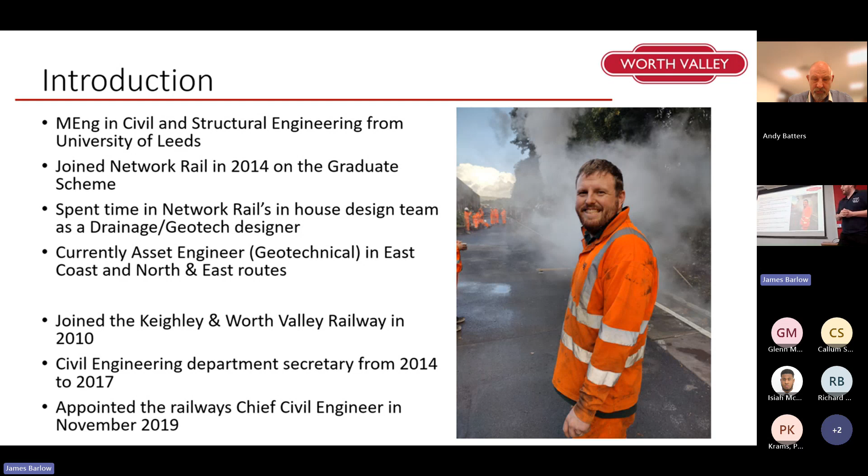The Keighley and Worth Valley Railway is located just to the west of Leeds on the way to the Yorkshire Dales. We join the national network at Keighley Station, which has 2 platforms that are part of the Leeds suburban network, overhead electrified. Then we have platforms 3 and 4, on a 99-year minimal lease that still says British Rail on it. And we then run up the Worth Valley to Haworth and Oxenhope.

Haworth, you may know, has been famous as the home of the Brontë Sisters. In terms of the railway, it's just under 5 miles long, with quite a lot of stations, a station every mile, and a lot of infrastructure to manage. It was opened in 1867 by local wealthy mill owners and then closed in 1962 by British Rail, as part of the Beeching Cuts.

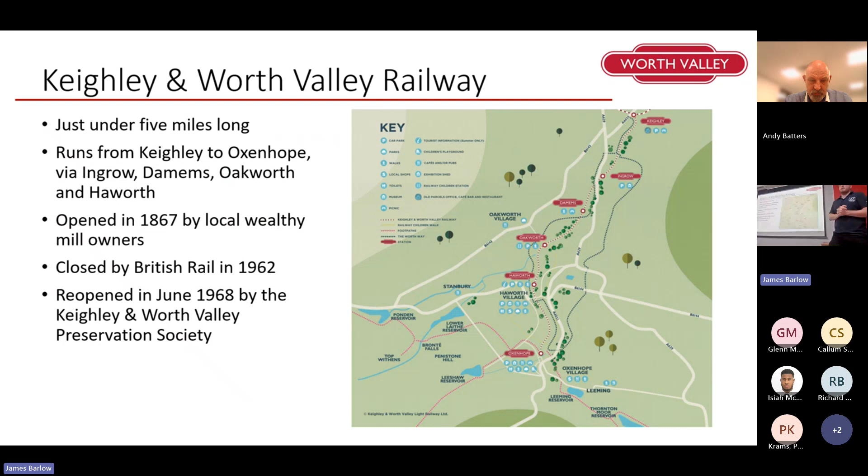Then in June 1968, it was reopened by a local group of enthusiasts and locals who wanted to see the line survive. Because it's such a key part of the local area, a lot of our volunteers actually don't have any interest in railways. I do, that's why I ended up there. But a lot of our volunteers are just local people who like the railway and where it is, which is quite different to a lot of them.

In terms of our department, we are 100% volunteer. There's no member of the team that maintains infrastructure that's paid. Volunteers come from a complete variety of backgrounds. There's a core group of us with industry experience who keep that professionalism and make sure the right competencies are there, but the vast majority of the department have no construction or rail background - ambulance drivers, lorry drivers, bus drivers, paramedics, IT business owners, a lot of students at the moment, and various other roles. We're called the Transatlantic Bridge Construction Company.

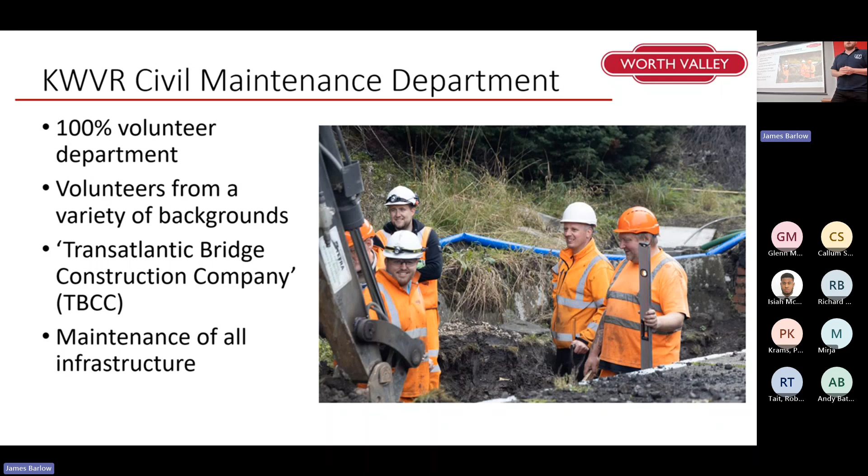I just mentioned that because it's our social media name. As I've said, that team maintains all the infrastructure, but I'm only accountable for the civil engineering. We have a track engineer and an S&T engineer who look after their respective areas.

So the theme of the presentation is trying to show what we as volunteers achieved. But I feel like at the start I should just point out all the people who did the bits that we can't do, because I don't want people to think we didn't have help or manage things professionally. So I'll list out the key ones.

The designers were Cass Hayward, a firm based in South Wales near Newport, can't remember the name of the town. We had temporary works design from Pell Frischmann - and the fact that the geotechnical director of the Wakefield Pell Frischmann office lives in Oakworth had nothing to do with that whatsoever. Bridge fabrication and installation was Beaver Bridges, piling was undertaken by Keller, and the large crane was Ainscough Crane Hire. We also had some local plant firms.

We had Vextrix supporting us with CDM compliance as principal designer. Special mention to the Environment Agency, who, including from myself, have at times had a bad rep over the years, but on this project couldn't have asked for a better partner to work with. I'll brag that I put a lot of effort into forming a relationship with them and making sure they understood the project, but actually we didn't have any hold-ups from the 7 permit applications we had to do throughout the project to get stuff done, which I think is quite a good achievement.

And Wyedean Weaving, they're an old mill next to the site that still make the beefeater costumes for the Queen and all the ceremonial stuff. It's a traditional mill - we used their car park, taking over their business car park for 7 weeks at 0 cost. So they deserve a special mention.

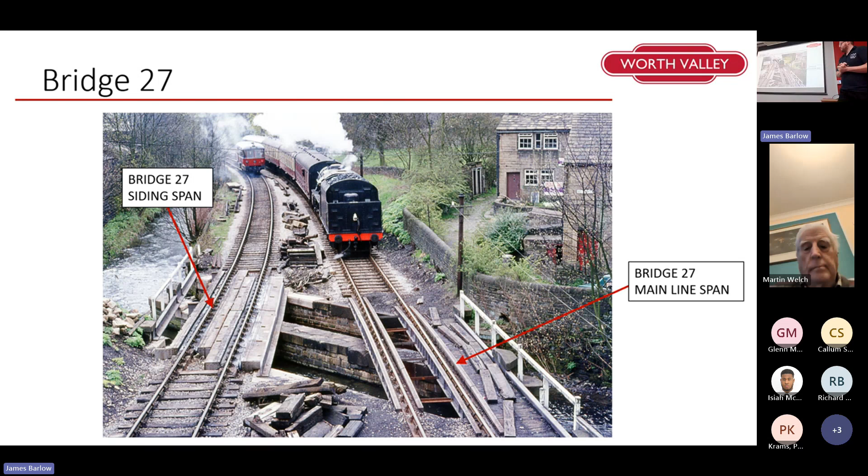But in terms of driving the project, it was all knackered - the substructure, the wrought iron girders, the waybeams - it was all well past its best when we got to it. That's what it looked like in the months leading up to the project. So pretty much the same, other than some new walkways and handrails, and looking a bit rustier.

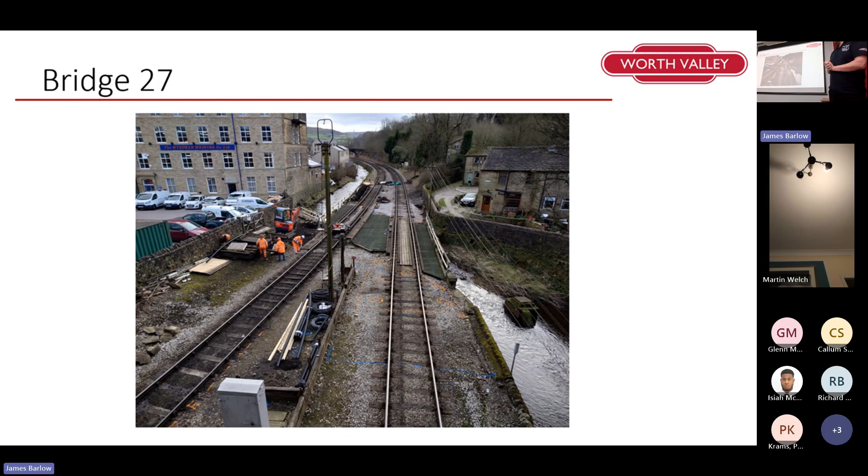Out of interest, you can see the location of the piles roughly drawn out there with the blue marks - that's when that photo was taken.

It was identified for renewal in 2014 as part of our structures inspections back then. It was originally built in 1889, and it was second-hand girders at the time, I believe, off the main Aire Valley line that ran up towards the north to Carlisle. So they were second-hand when installed in 1889, and they started to suffer from significant section loss.

The substructure was also in really, really poor condition - we didn't know what it was founded on, and trying to work it out was incredibly difficult. We wanted to really get rid of our last timber waybeam structure on the branch as well. I think we had 6 when we took it over from British Rail, and my predecessors had removed 5 of them, so we were really keen to remove the last section.

And not only that, as I'll show in a minute, this is a constraint on the river in the local area and leads to flooding of the lower Mill Hey area of Haworth, which is about 9 properties and 10 businesses. There are some dramatic photos online if you search Haworth flooding, but basically this one section of the river is the only section that's under capacity.

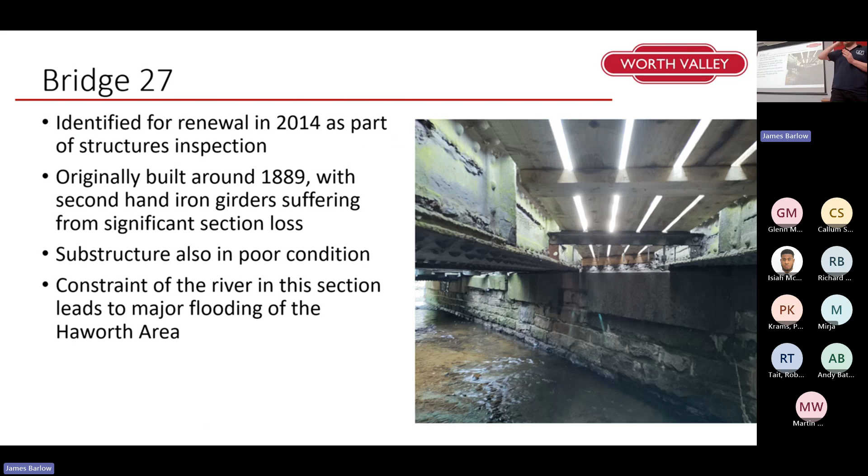It comes out the river here, and even though 20 metres downstream the river's got full capacity again, the water doesn't find its way in - instead it comes through our line and our yard. So that's it during a heavy storm, Wyedean Weaving car park on the left. That's it during a heavy storm, and that is our locomotive maintenance depot during a heavy storm behind us.

And then where you can see the chimney in the distance, that bottom area of Haworth then gets about a metre underwater. So this is part of a long-term strategy to try and improve the river capacity in the area as well. There was a number of reasons to try and renew it differently to how it was, including trying to remove that central pier.

So because of that flooding incident, we then turned the project - after identifying it in 2014 - into something different from a like-for-like replacement. We then had a more urgent bridge renewal, which got handed to me a month after I took over as civil engineer. And then COVID obviously had quite a large impact on our operations during the early 2020s, which delayed things.

Options report in 2021, and that's when we really started to get involved in the design development. At that point, I knew how key the discussion with the Environment Agency was - so before we'd even selected an option, I got the Environment Agency to site and explained what we were doing.

The key there was getting them to site, because when I tried to explain to them that we couldn't lower or increase the soffit of the bridge, since the structure gauge on the local structures was already at limit and we couldn't raise the track, the local flood officer just replied with a blank look, saying they didn't understand what that meant, insisting we had to raise the soffit of the bridge.

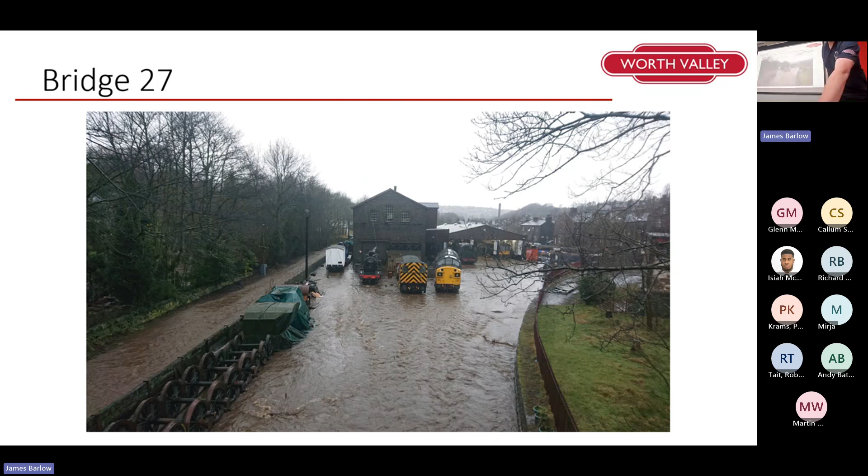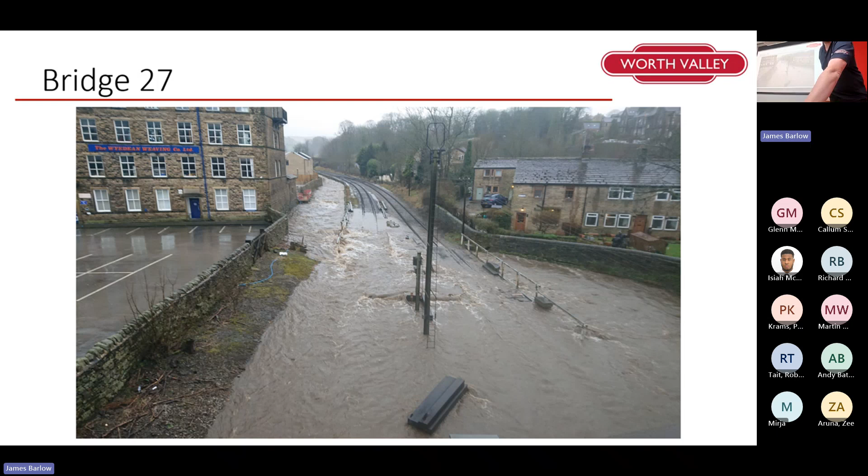But when you get them to site, you can ask, is that train going to fit under that bridge? Helpfully, when I got them there, a train came past and you could see how tight we were. The bridge I'm stood on to take that photo is already tight to structure gauge, and we're on about a 1 in 55 gradient, so in terms of vertical alignment we have very limited options.

In 2022 we started design development, and by mid 2023 we'd established the project budget. Initially it was £750,000. The quote for the steel deck between the options report in December 2021 and March 2023 went from £220,000 to £690,000 for fabrication and delivery, so it became quite an expensive project.

The final figure was 1.25 million pounds. The most expensive project the railway had ever undertaken before that was £155,000, so in terms of scale for the organisation it was huge, and it held quite a lot of pressure.

Once we realised we were getting towards that scale, we assembled a Worth Valley project team. It's worth pointing out that team was formed of about 20 volunteers, and we met every two weeks for three hours on a Tuesday evening for two and a half years, plus all the activities on site. It was a large volunteer team who put a lot of time into this project.

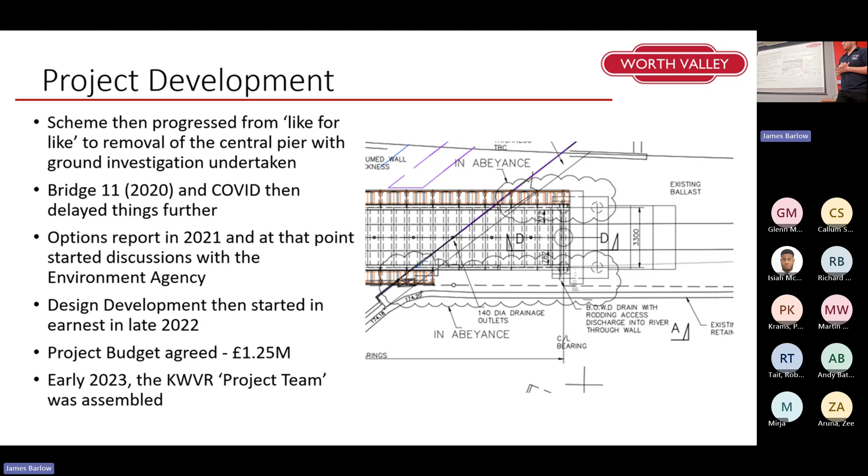I've already skipped to getting the Environment Agency on board with the project. We should have had to raise the soffit of the bridge by 400 millimetres, but they allowed us to keep it as it was. We couldn't lower it, but keeping it as it was was an achievement, and we were pleased they did that, because it allowed us to lengthen the span.

Other than the Environment Agency, Ainscough were the first company I contacted. While we were developing the project in 2023, we got wind that a crane hire contractor had been refused access into Haworth for a 50-ton crane. Our calcs showed that we actually needed a 500-ton crane to lift this in.

We straight away went to Ainscough and asked, what do we do here? They had a good relationship with the council, which helped us successfully apply through the council for a £1 million Community Ownership Fund grant to fund the bridge. The Worth Valley could have afforded to replace this bridge, but would have had to defer lots of other things. So this grant effectively allowed us to carry on with our locomotive overhauls and other restoration areas, such as Keighley Station, which had just recently been completed.

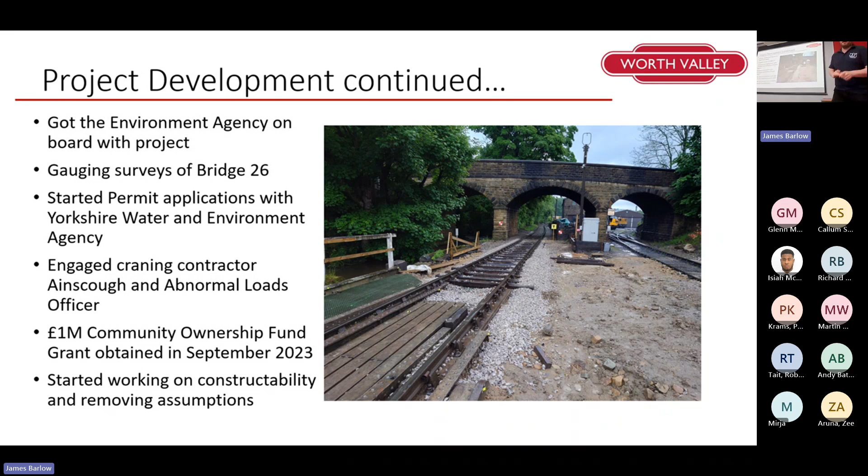Just a little bit about subterranean obstructions, apologies for the poorly drawn diagram. The black line on the left with the blue is the water, the river. The black is our abutment. There was a culvert that came out of that abutment, and you can see the grey assumed route - that's where it was mapped on our records, on the Yorkshire Water surface water drainage records.

And on the line plans from the original construction of the line. Where the culvert actually went when we dug it out was that orange circular route, basically following the piles. I still remember the day I was in Slovakia when the team dug that out. We realised there was a problem, that it wasn't quite as the drawings were telling us. We said, right, we're going to have to take the track off and dig, and we're going to have to find it. They sent me a picture of it, and I still remember the bar I was in Bratislava when I looked at it and just went, how?

When all 3 different independent sources said that the grey was the assumed route. We also found at that point, which is lost information rather than it being poor records, that there were some cottages next to the railway that had been demolished for the railway, and the cellar floors were in the way of that. Because we were rotary piling, any of these would have stopped the rotary piling from being done. So yes, interesting - I like the diagram because it follows the piles so beautifully.

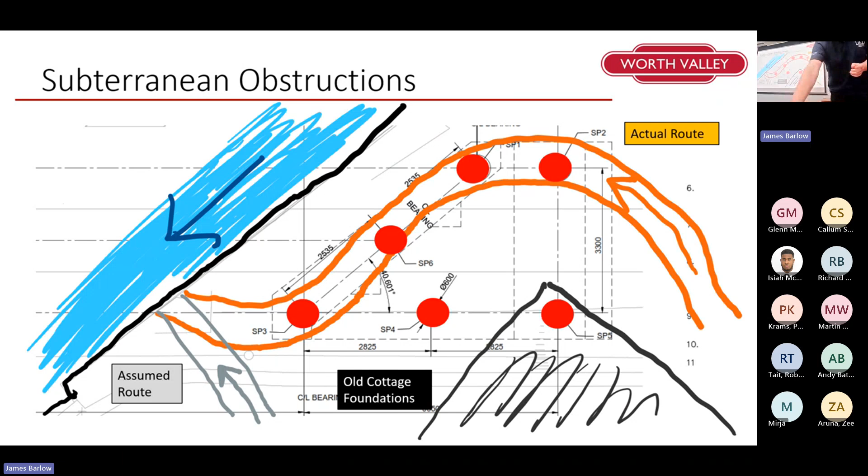Detailed design. Cass Hayward, who for me and a lot of others is definitely one of the leaders in direct fastening - while we'd managed to get rid of the timber-way beams, we couldn't get rid of it being direct fastening. We just didn't have the headroom to put a ballasted track in there. It will remain our only direct fastening structure on the railway. And as I said, Vextrix supported us with CDM compliance as principal designer.

So the final design ended up consisting of a 23-metre span - that's 23 metres on the skew from the furthest ends, or 17 metres if you treat it as a true skew. It's sat on 2 pile caps at each side, which you can see on the 3D drawing at the top. Then you've got a short triangle section on top of that pile cap to flatten off the transition from the solid track onto the ballasted track, with transition slabs sat in the pocket there as well. It was 6 piles, 0.6 diameter, 16 metres deep. The pile number changed numerous times through design.

The ground investigation information was 6 years old by the time we got to it on this project, and was undertaken by my predecessor. Due to a self-confessed oversight on my part and the designer's part, we didn't spot on one of the boreholes, in italics with an asterisk next to it, that they'd hit artesian water at 20 metres - for those who aren't aware what that is, effectively when they got through all the clay, this part of West Yorkshire is what I would describe in technical terms as really bad clay. And when they got through that down into the bedrock, there was enough pressure in the water in that bedrock that the water came 3 metres out of the ground.

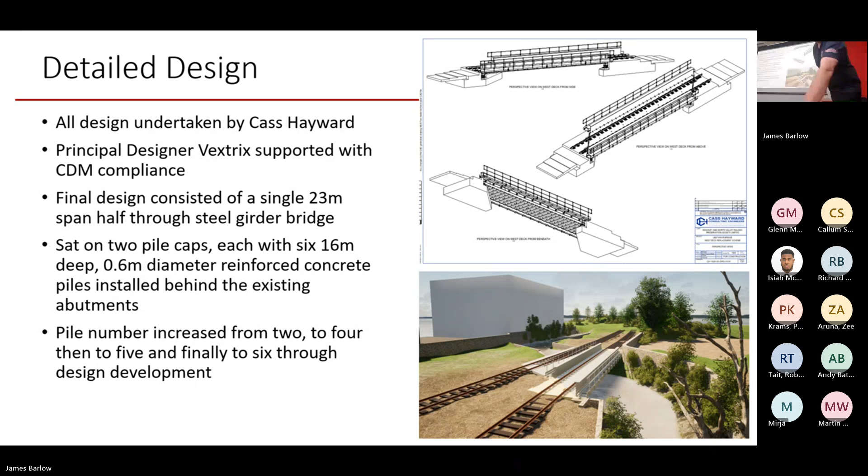So in terms of the design, track is directly fastened to the steel deck via Pandrol VIPA base plates, which I knew nothing about until I used them on this project as a geotechnical engineer. Effectively you've got a seating plate on the deck, and the VIPA plates are attached to that seating plate, meaning at no point to undertake maintenance do we need to get under the bridge for any bolting.

That was quite a key change we made partway through when we realised we had 25mm to play with, so we used that 25mm to get those plates on there.

As I said, the steel deck is still very skewed with the concrete pile cap squared to the track alignment. The pile caps are completely separate from the existing masonry abutments on the bridge. The pier gets removed, but the abutments are kept as river training walls effectively, and we've got concrete fill between the pile cap and the abutment wall.

It's probably worth mentioning one thing we did in the planning - although we don't need planning permission, it's in a conservation area, so we need prior approval from the council. We have to demonstrate we're doing everything we can to maintain the character of the area and not doing anything adverse. So maximising the amount of masonry still on view and hiding the concrete was one thing. Painting it grey - the final colour is grey, same as all the other metallic bridges on our railway - and the existing handrails are white, which is why our handrails are white. Those were the three things we did to placate the council.

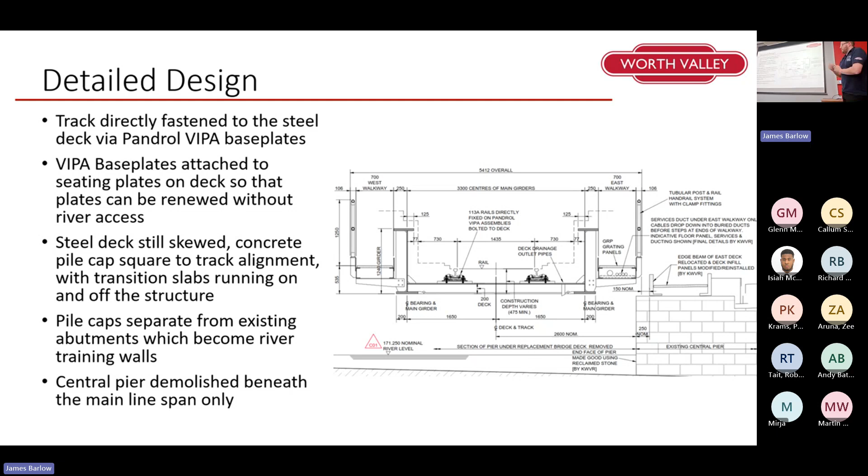There was no reason not to, it didn't affect us particularly. And then the central pier was demolished, but only beneath the mainline span, not the siding span.

And then there's some pictures of the detailed design, so you can see the VIPA base plates. For anyone with experience using base plates like that, every single base plate needed an individual amount of shims when we installed it - that was a fun Tuesday.

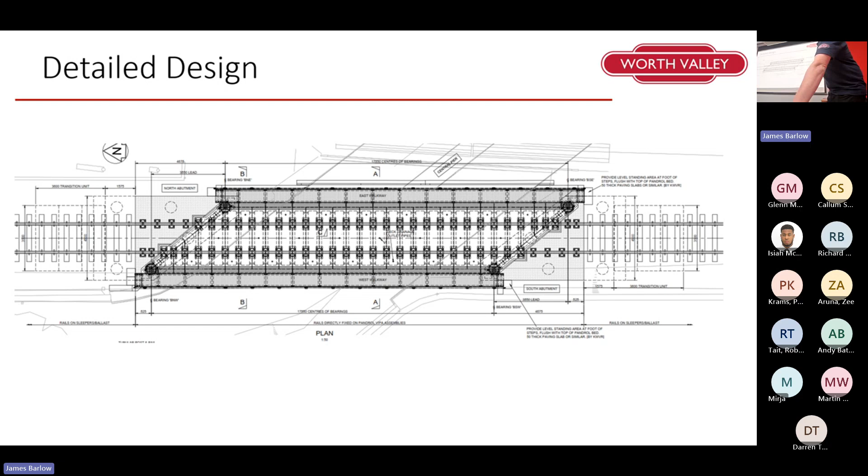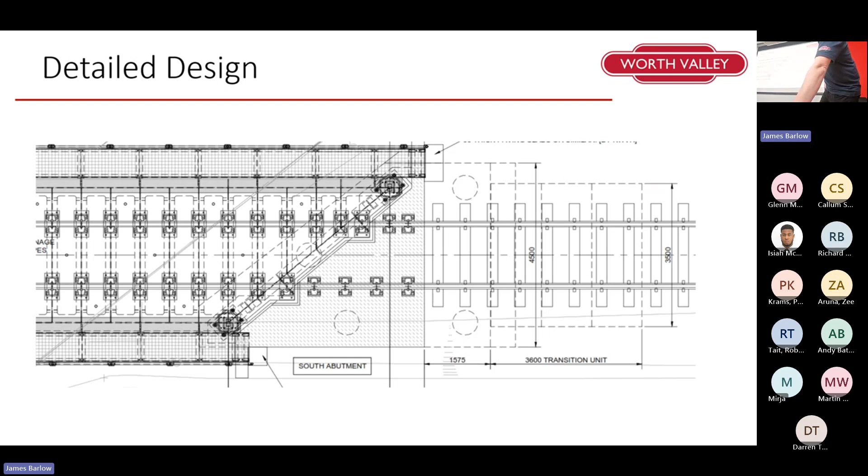That's just some more detail on the end. So you can see the 6 piles were not loaded evenly - you've got the 2 piles directly under the bearings on the skew there taking most of the load, and then some additional piles just to take the rest of the load.

And then there's your elevation view as well. You can see on the bottom section, with the gradient in the concrete, it was quite challenging for setting out and the reinforcement. That's why the Worth Valley didn't do that with our little cement mixer - we left that to Beaver Bridges to do through their subcontractor, who I can't remember now, but they are Middlesbrough based.

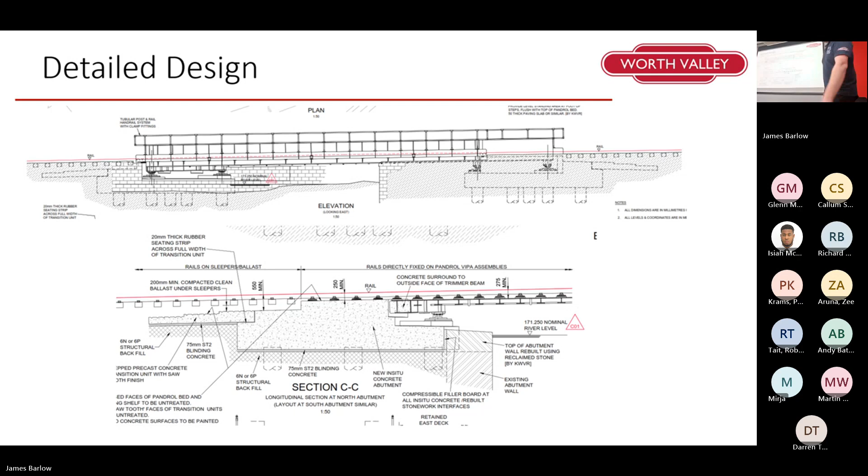In 2024, in February, we then did diversion of services. We've got overhead telecommunication services still, like the old school telegraph lines, and some buried stuff too. Every service we had was in the way of this job, so we went 100 metres north of the site and south of the site, got them all into a single duct, took them away from all the work around - which was quite a lot of work in itself.

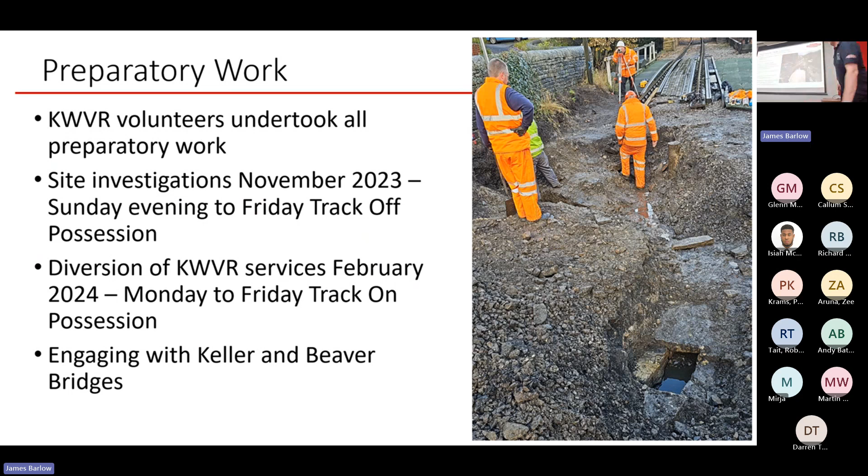And at this point, we're starting to go into contract with Keller and Beaver Bridges as well. And then piling platforms designed by Pell Frischmann, widening - weaving car park again, showing its worth with the access gate into the site.

Pell Frischmann designed some piling platforms for us. We worked with them to get that to a level the Worth Valley could build ourselves, so we installed the piling platforms ourselves with locally sourced stone. If Wyding Mill wasn't there, you'd be able to see the quarry that stone came from, we could hear the lorry leaving the quarry with the stone when it was coming down.

We had to get it tested, and spent a little bit of money doing that because it was a quarry that didn't do its own certification. We needed 6F5, and they wouldn't certify their own, so we collected some, took it to Leeds and certified it as acceptable and used that. That was a lot cheaper than going to a further away quarry, and it's always good to use local.

As a railway we try to put money into local businesses as much as we can, and we do a lot. All the plant hire was from a local farming plant hire company just up the other side of the valley.

In that picture, on the south side of the bridge you can see the diversion of the drainage. Instead of it running along the line, we took it and hugged that wall as close as we could get the trench boxes to let us. There was 2 mil between the new pipe and the pile cap when it was installed, so we used all the room that we could possibly use.

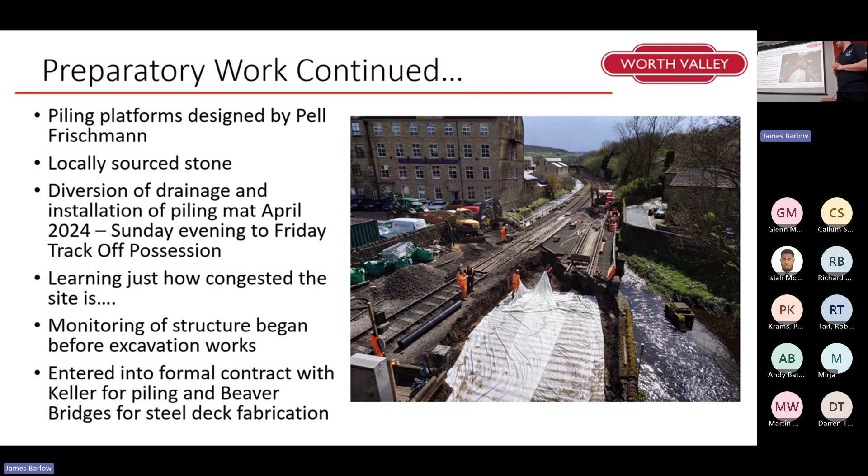And then piling - I think this is one of my favourite photos, showing how difficult the site was to manage.

One way of keeping our costs down is to not bring in rail contractors, because they are more expensive than high street contractors - there's no getting away from that. So a key part was extensive briefings and our supervision of site, and we did all of that.

What you can see there is Keller piling on the north side, and then you can see us using our train to bring in stone to do the piling platform on the other side. Again, the widening weaving car park is full of plant, full of equipment, no cost. And you can see the existing bridges left in place while we're doing all these phases - I haven't touched on that.

It would be much more efficient, and probably cost a little bit less, for us to just say we're going to do this in 6 weeks and do the whole thing. The main thing stopping us is actually volunteers, because my work aren't going to let me have 6 continuous weeks - I'm off for 3 months for shared parental leave at the moment, but for this I can't just take 6 weeks off work. I don't have enough leave, and we can't resource that as volunteers at all. So the staging of the project is just the only way we could deliver it - that's why that bridge is stayed in, and that's why it's covered in monitoring. I'd have much rather just removed that bridge and got cracking.

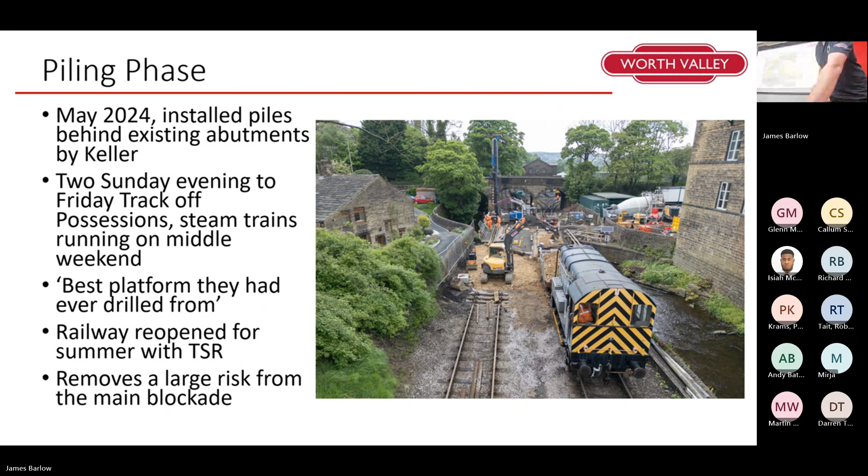It's just some aerial shots again showing just how close to the existing structure and how tight that is. That piling rig couldn't be any larger than that, because it had to fit on the siding span to get it to the other side of the bridge. There is no access to the railway, there is no access for non-rail plant anywhere on the other side of the bridge, so any non-rail plant had to go in over that structure. So that was the largest piling rig we could get.

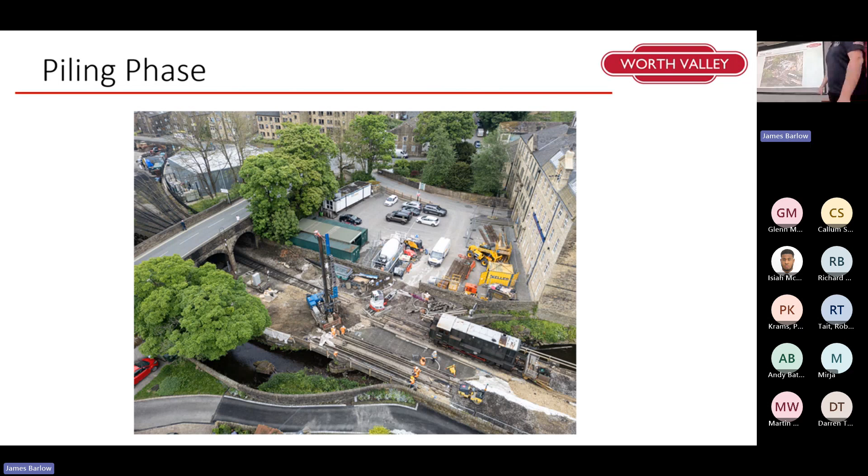Bridge fabricator Beaver Bridges has got a facility in Wigan. I think they're Shrewsbury based, but they've got their facility in Wigan, so it's nice, just along the M62.

There were lots of challenges around the fabrication. They had their challenges, particularly around the quality of the steel initially, and also the direct fastening nature. So while they've done rail bridges, they've not done a direct fastening rail bridge, and understanding that to the mill tolerance, as my track engineer regularly told me - well, they learned some lessons, and as did we.

I do remember an entertaining conversation with them when they asked to delay the possession for 3 months, which would have put the possession on the due date of my wife's first child, and I explained that to them. At that point, they started working weekends and evening shifts. To credit to them, we offered to cover 50% of their extra staffing costs to speed it up, and they rejected us on that and didn't do it. So fair play to them on that, and they did deliver it in time.

What it did lead to is we didn't have enough time to adjust the track design. So getting the track right over the bridge at the end was a last minute thing, and it wasn't as quick as we'd have liked.

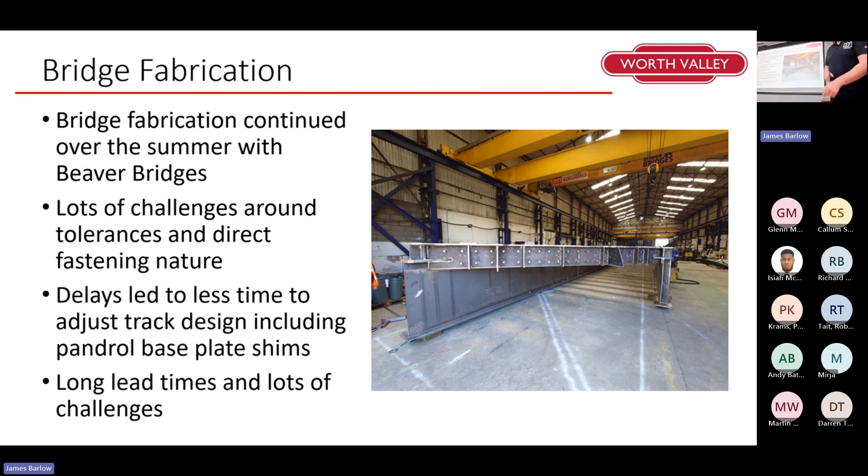And the Vipa base plates have very long lead times on the shims, like 6-week lead times on shims, which we found quite interesting. At 20 grand - not 20 grand a unit, 20 grand for all of them, I think, can't remember actually - it was a lot more than I thought it'd be.

So by the time we'd actually worked through the program, we worked out Beaver Bridges really needed to be on site on day 1. Originally we were planning for them to be on site on day 3, but to get it done in the 19 days we had, we needed them on site on day 1.

So we undertook demolition on Sunday night in one hit. We demolished everything we could in advance of the possession. All the walkways were removed, and any bits of the pier that didn't support any structure were removed as well. And we managed to do that in evenings in the summer.

So throughout July and August, we were running 2 engineering gangs a week on an evening, like 5 till 9, including delivering materials. I include that train only because we think it's the heaviest train that's ever run on the Worth Valley for anyone of note. We think it was - I can't remember the tonnage now, it's far too long - but we think it was the heaviest train we've ever run on the Worth Valley.

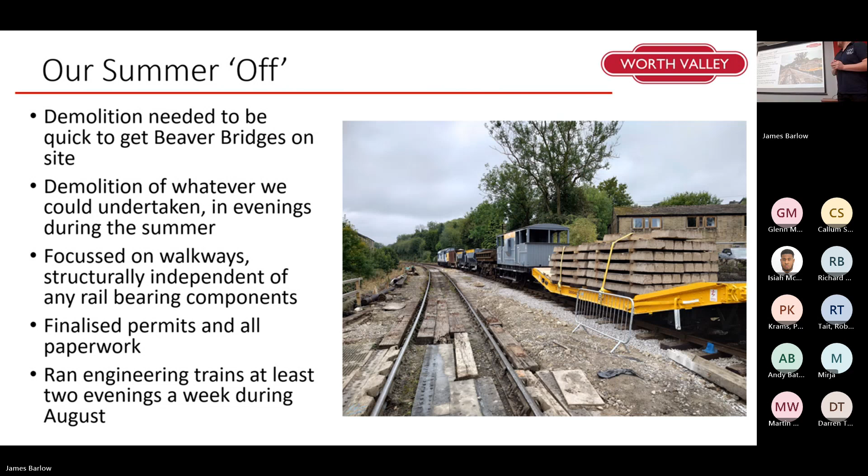We finalised all the permits and paperwork, and as I said, we ran the engineering trains 2 evenings a week. One thing I do love about volunteering at the Worth Valley compared to work is that it takes me about 5 minutes to take possession. It's that simple. And it's not simple as in unsafe or cutting corners, let's just be clear, but just the simplicity of our operation means that he's ready there with the impact wrench, because in 5 minutes time he was undoing fish plates.

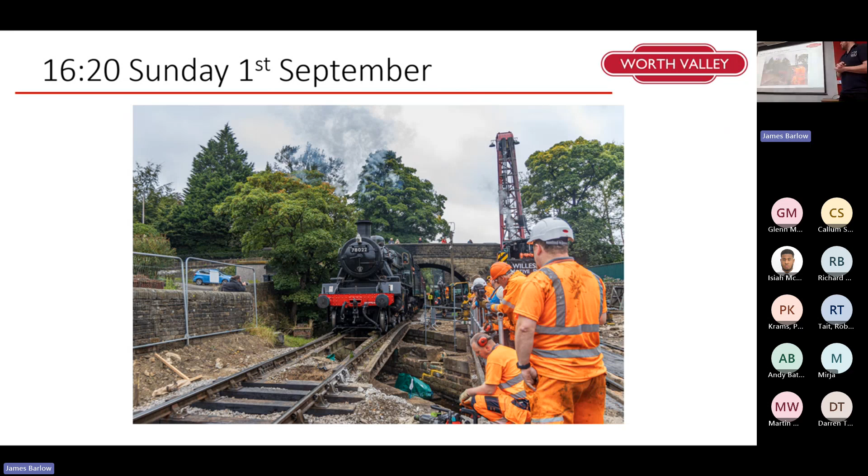It's a bonus, but it also allows us to do as much work as we can in the evenings, which we take a lot of advantage of.

So this is then us into the main blockade in September. We started after the last train on Sunday, the 1st of September. Time to take possession around 5 minutes, which I've said.

We utilised 2 steam cranes to remove the track and the girders. I like using these cranes, they are really, really nice. What you don't realise about a steam crane is they're silent - you can talk to the driver. They don't make any noise at all, which, having worked with diesel cranes, is fantastic.

It makes it safer, and they're also just quite cool, I'm afraid, they really are. So that is a 50-ton crane from the 1930s that used to be based in Willesden Depot in London, that's been restored by Bahamas Loco Society, and that's it taking the main girders out. It managed to get that done in about 30 minutes, and once we'd done that, they were put to one side to be moved by a smaller crane up the line. When I say they're really good, they are quite slow, but other than that, they're good.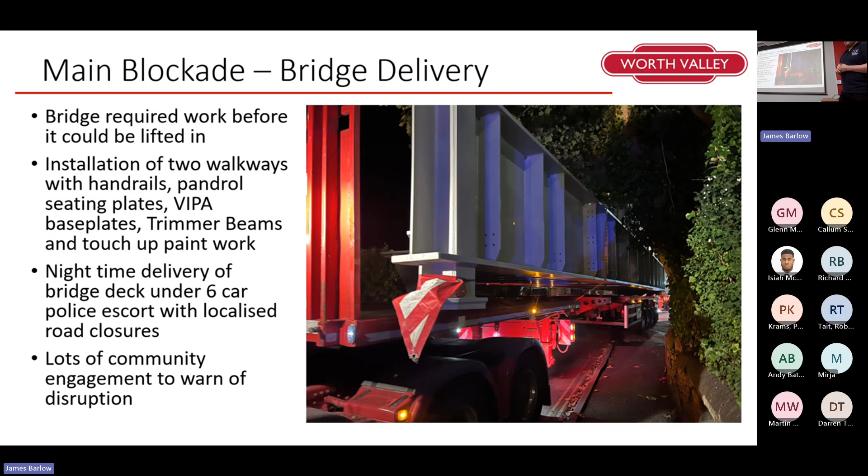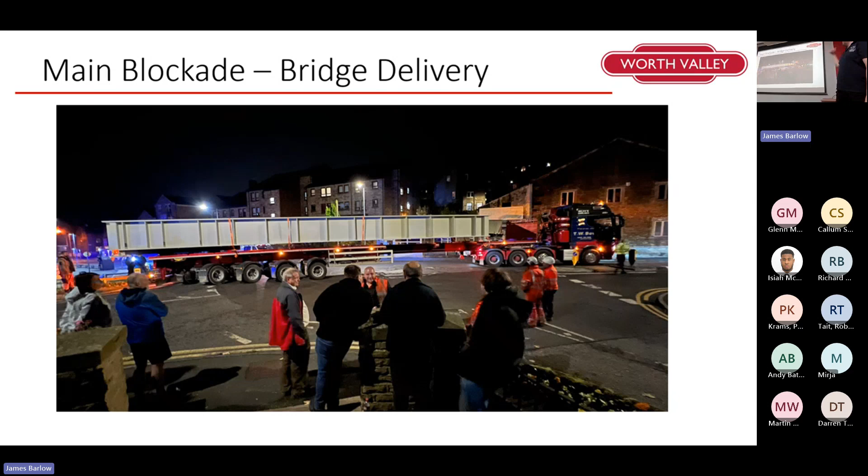They were really understanding, all out watching all the phases of the work. And that's it, doing a 16-point turn on the mini roundabout, coming forwards down the road to the left, coming in, and eventually reversing towards the camera. This was 11:30 at night. You can also see how much room it takes up in the Wyedean Weaving car park.

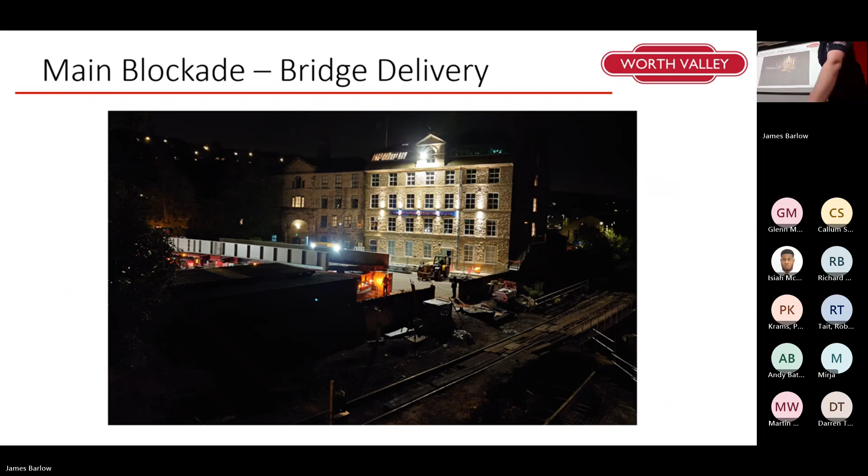So in terms of the main lift, good crane picture, always like a good crane picture. This was the bit that required most of the planning, and it only took 10 minutes. Special dispensations from the Highways Department, which I've talked about. The council were really good to work with on this.

And what do they call it, the Abnormal Load Officer for West Yorkshire. If anyone knows, West Yorkshire is particularly strict on their abnormal loads, requiring police escort at all times, which is unusual. North Yorkshire, for example, is not like that.

A 50-ton deck by the time it got lifted in, with a 450-ton capacity crane. It was not at its limit obviously, with the conservative element of it, but that was at its limit for what it could lift.

You'll also notice just how accessible the site was for people to watch. I remember my brief that morning reminding people that they will be on YouTube that day. Just to preempt a question, the bridge is installed at that point and the people on the right have been allowed back there, they weren't there during the lift. We had about 250 to 300 people from the local community, and my parents came as well, which was quite nice, since they don't really know what I do at the Worth Valley, so it was nice for them to see I'm actually doing real stuff, not just playing with trains. That was a good day, and the sun shone all day.

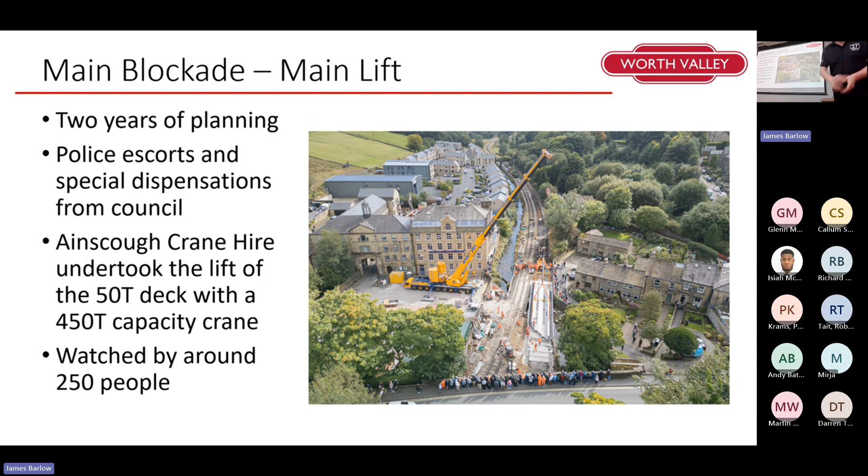And then we go on to the track reinstatement. I'm not the track engineer, so I don't know a lot about what the track put in, but it was bullhead, and it is now 113-pound flat bottom, and we are in the process of welding it up.

There was the horizontal alignment change because the new bridge was longer, so the horizontal alignment had to change because it was straighter for longer. And the vertical alignment changed because the bridge is on a slightly different gradient to be able to get the track under the adjacent overbridge.

There's been a follow-up track renewal to finish the job, not next year - I didn't update that bit two months ago. It's actually formed part of a wider track renewal, and hopefully by the summer that will be our first section of CWR on the Worth Valley, which is going to be just over a quarter of a mile, maybe a bit longer, including over the bridge. It'll be the first section of stressed up CWR.

Breather switches have been installed at the south end as part of this job, and we undertook about 100 metres of track renewal to the south of the bridge. Lovely, we're about there, we're good. We finished that off this year, just haven't done the welding and stressing yet.

That's the other steam crane, so that's only a 10-ton steam crane, also from the 30s. Very good P-way crane.

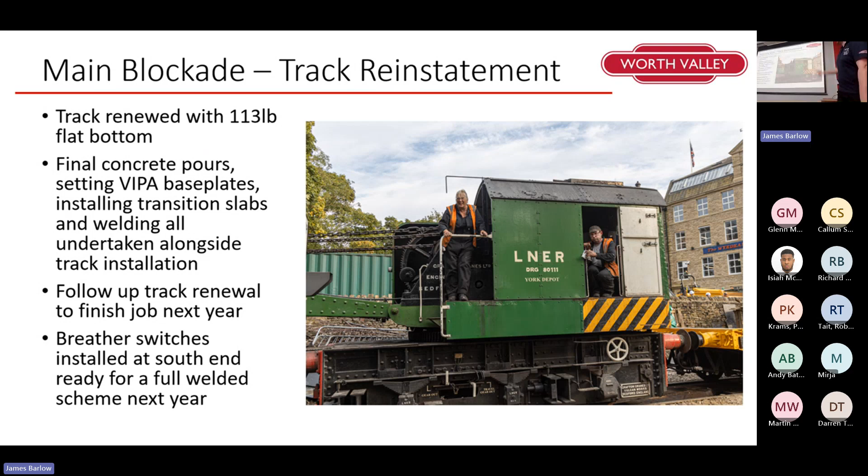And then the first train we ran on the morning of Friday the 19th with ballast, which is that train there. Not to be underestimated, having done all those possessions and sites over the summer, how much mess we had made.

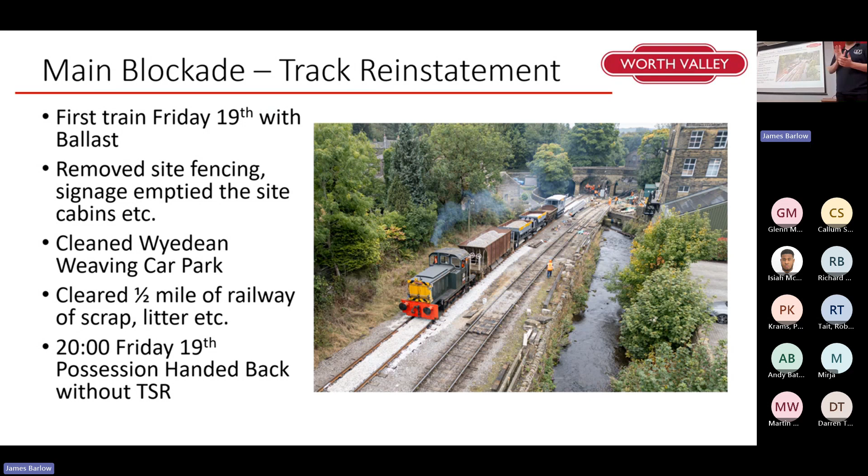So all the helpful volunteers that weren't up to track packing on the last day removed all the site fencing, site signage, the site cabins, and cleaned the car park, because in 3 weeks of mixing concrete there we had made quite the mess. We cleared half a mile of railway, and then at 8 o'clock on Friday the 19th we handed the possession back. We managed to hand it back without a TSR as well - we're only a 25-mile-an-hour railway, so it's not that much of an achievement, but it's still quite pleasing to always hand back without a TSR.

I'm going to skip back to that. I think it's right to talk about the challenges. I will wax lyrical about how amazing this project went and how good the project manager who led it was, but actually we did get quite a few things wrong, and there were quite a few pitfalls that we went into.

Volunteers are the best and worst people in the entire world. They are great for being keen and turning up, but they also have opinions. We had a lot of arguments internally, like, how dare you close the car park that I park in to maintain my steam engine for a day because you need to host 5 HGVs and 2 cranes? I want to park there. Well, can you not go and park across the road? Well, that's £1.10 for the day. You're like, right, okay, go away.

Having that, it's good that people are passionate, but sometimes it can create clashes. Really tight access, and also stopping them wandering to the site to have a look - that was the other really big issue. We had 2 layers of Harris fencing blocking areas of the railway, not for public, for our own volunteers.

Really tight access within the site and including the wider local road network. We identified that early enough in terms of the wider local road network, and we worked with all those stakeholders to get that sorted. But in terms of the access on site, I don't think we appreciated how tight the site was, and there was a lot of replanning and updating plans and risk assessments on the job as we did that, and that's certainly something we've taken from this job going forward.

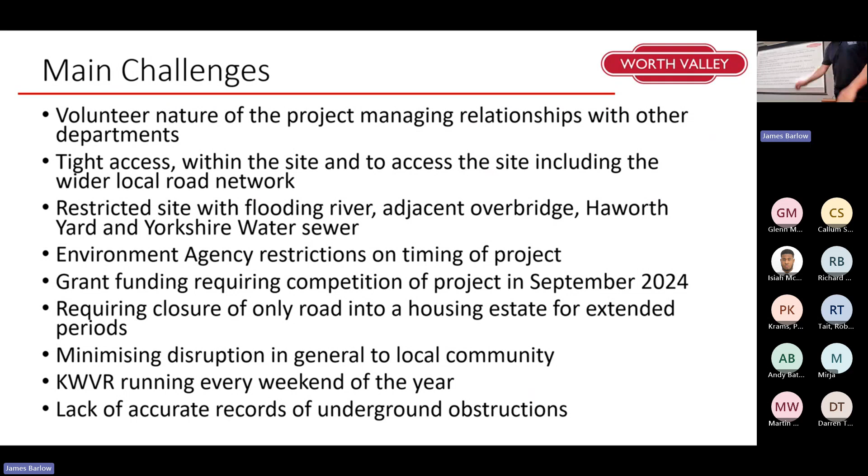So just going back to finish then, what did Worth Valley Volunteers do on the project? All the project management, project engineering, and we acted as principal contractor. So under CDM, very unusually, we acted as the client and the principal contractor. There's two reasons for that. One is, for us to be able to do the bits that we can do ourselves, we can't contract it to a principal contractor and then subcontract it back to volunteers - that is a contractual mess.

So we keep the principal contractor to be able to do as much as we can. That is because we have enough of us out in the industry that can support that. The other thing is, in terms of managing risk and cost, we can't afford to contract out the big risks. We just can't afford to do it. So we have to manage those risks ourselves.

We have an appointed person who's done craning all his life and did all the associated lift planning, other than the contract lift through Ainscough, but obviously still a lot of involvement in that as the principal contractor. We coordinated all the projects and site activities, and we managed the site. Our engineers had the final approval on all works, even the stuff from Beaver Bridges. We signed off all that and inspected it.

All the temporary works was done by us, including the piling platforms, all the site cabins, fencing. The fencing changed daily depending on what we were doing in the Wyedean car park as well, which isn't that much, but it's just something else. We did all the track design, removal and reinstatement because we have the right volunteers to do that. All the operational planning, possession management, as well as running all the engineering trains we did ourselves, all the community liaison work, all the demolition work, and we drunk an awful lot of tea.

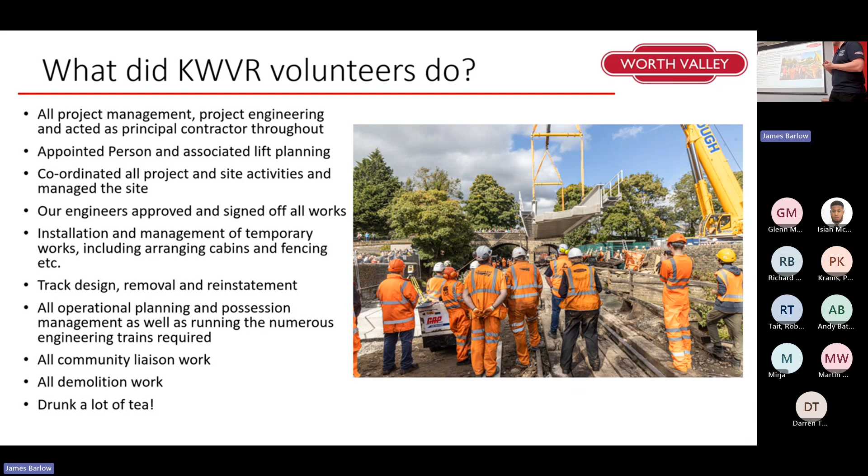And I think that's about 45 minutes.

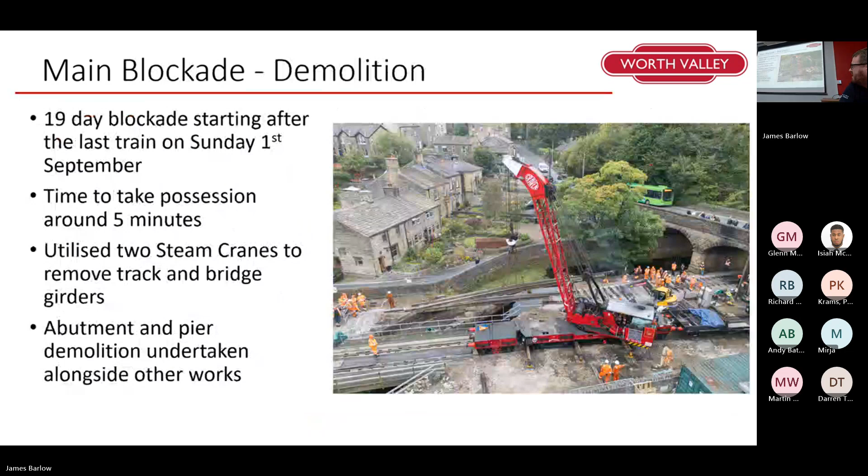See that sewer in the river on the left? That stands up to bank height, and that's just in the middle of the river. Obviously Yorkshire Water didn't build this sewer. This sewer predates every organisation that currently has any involvement in it. But yeah, it's not great.

It would, to be fair though, removing the sewer, you'd also need to renew our other bridge to do that, and we'd need to do quite a lot of work to deepen the channel, because the footings of that siding span we think are only about 2 foot below bed level - they're not deep footings at all.

The river floods again, it's gonna come straight through your workshops again. Yeah, we'll do. It'll continue to do that. I've told the railway that we cannot reasonably stop it. So I've said what we need to do is be resilient.

It's just too much water. Thank you. Any more?